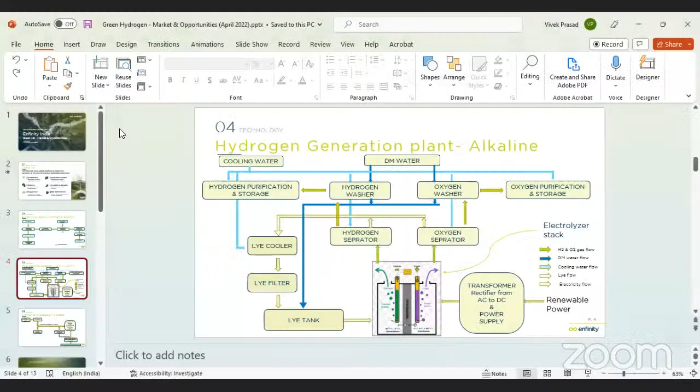But let us discuss the main topic here. Before going into the market opportunities, let me give a very basic idea about what we're talking about in terms of a green hydrogen and ammonia system. This is a basic flow diagram showing how a simple hydrogen plant and an ammonia plant look like.

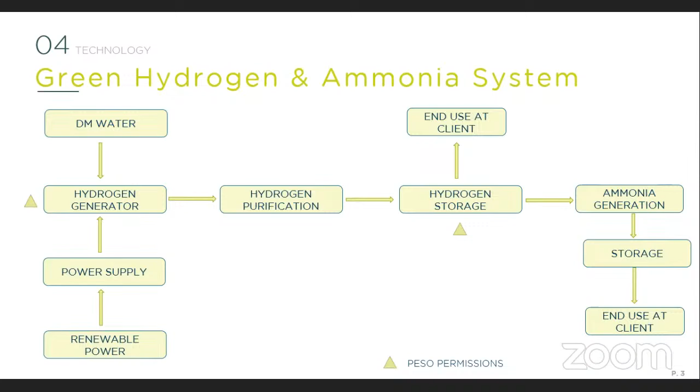This is a basic layout of alkaline-based technology. In the middle, you see the core of the electrolyzer. On the right-hand side is the renewable energy, which you convert from AC power into DC to power the electrolyzer. There are hydrogen and oxygen separators, which form part of the balance of plant. You also need cooling water to reduce the temperature so it can be reused. This is just a flow diagram of an alkaline-based electrolyzer.

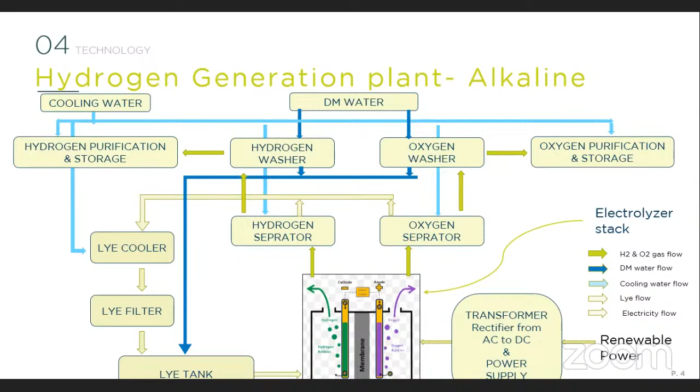For PEM-based and SOEC technologies, you will get more information as we move forward in the webinar.

So again, if you are going for green ammonia, you use green hydrogen along with an air separation unit, which generates nitrogen. That nitrogen is put into a high pressure, high temperature reactor with an iron catalyst to give you ammonia, which is in gaseous form and has to be cooled so it turns into liquid. This is just a basic process of ammonia production, though complications arise at the detailed engineering level. I just wanted to give an idea of how production of ammonia and green hydrogen looks like.

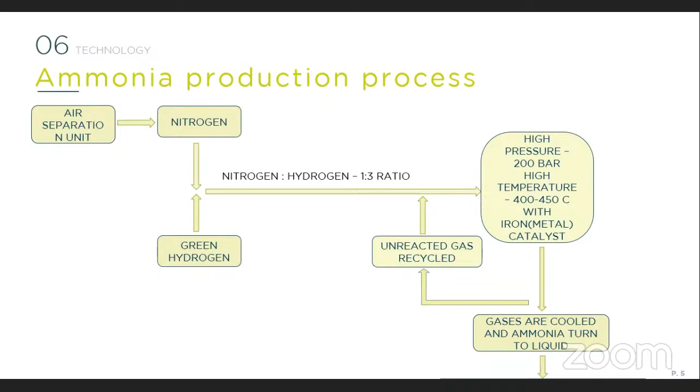Let us go further into how a business structure for hydrogen typically looks like. As a developer, I'll give you an idea of the structure and business model for hydrogen. This is one of the models we are working out, very similar to renewable energy - similar to the RESCO model. The basic difference is that the pricing of hydrogen or ammonia is based on per kg or per ton of output, whereas in renewable energy it was per kilowatt hour of power.

So at the end of the day, one is the end user of this green hydrogen. In between, there is a developer of the green hydrogen project as well as the ammonia project. The developer has to take a technology risk and the renewable energy cost risk. So that is how the structure will look like for much bigger projects, because the developer will be doing such projects and then will have an offtake agreement with the clients. On the right hand side, you can see what things are usually included in the pricing when you talk to the client about such projects.

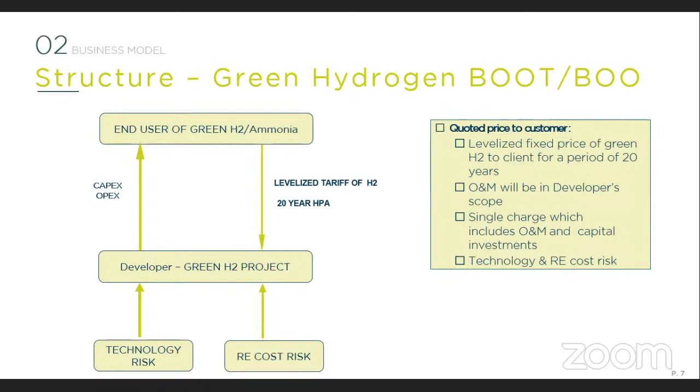Moving to the factors that decide the market for green hydrogen and ammonia. Let us first understand how the pricing of hydrogen is getting affected by different factors.

One is the cost of power. Now, cost of power is depending upon 3 to 4 important things. One is definitely the banking for green hydrogen projects, when you are setting up a green hydrogen plant.

So you know that there is an intermittent supply of renewable energy. Renewable energy cannot be a 24/7 work. So therefore, you have to try to get a banking facility for the green hydrogen in that particular state. Banking in green hydrogen projects is very important. Otherwise, if the banking is not available, the cost of power will increase manifold. The reason is that to set up an X size of hydrogen plant to get that 24/7 output, you have to set up a much bigger size of the hydrogen plant and the renewable energy. So therefore, that is one of the factors.

Then TOD is the important factor. Time of the day is defined differently in different states, depending upon the peak demand and the non-peak demand. So that has to be considered.

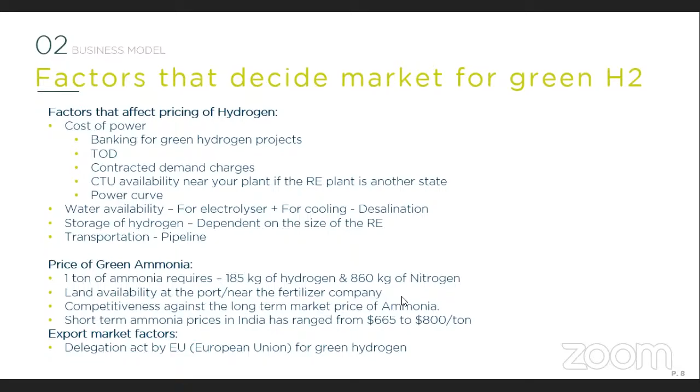Let's talk about market opportunities. In terms of market opportunities, I'll talk about green hydrogen first, then green ammonia. For green hydrogen projects, I'm talking about distributed sizes, and for different sizes I've mentioned relevant industries.

If you're planning to set up a 100 Nm3 per hour to 1000 Nm3 plant, about 1 to 5 megawatt, you should target the steel industry, which uses hydrogen in their annealing process. Then there's the glass industry, which uses hydrogen to avoid unwanted oxidation, increasing efficiency. In chemical, pharma, and food industries, hydrogen is used in the hydrogenation process. Finally, thermal power plants use hydrogen as a coolant because it has a very high specific heat.

These are the industries that look for these smaller, distributed plant capacities. When I say distributed, I mean these plants have to be set up at the company's premises itself. However, you can set up the renewable energy part outside the company premises.

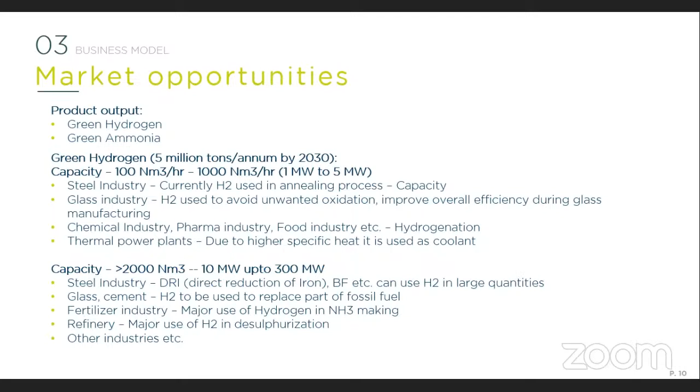When you talk about green ammonia, I will be talking majorly about export in terms of green ammonia. So if you talk about capacity of ammonia, we are talking about 0.175 million tons to 0.87 million tons of ammonia.

Hydrogen is a very difficult gas to store and transport. Because of the huge volume it needs, it is not feasible to store it for longer hours. I'm talking about the size of the vessels compared to ammonia, which is easy to convert into liquid form and then can be stored. So these things can be done easily, making it easy to transport ammonia over longer distances.

Therefore it is easy for export as well in outside markets. Now, if you see the major markets in the world for ammonia, other than India, there is the EU, which is planning for 10 million tons of hydrogen, equivalent to 50 million tons of ammonia. Similarly, Japan is planning for 3 million tons of hydrogen, and South Korea for 3.9. This is the requirement of these countries by 2030.

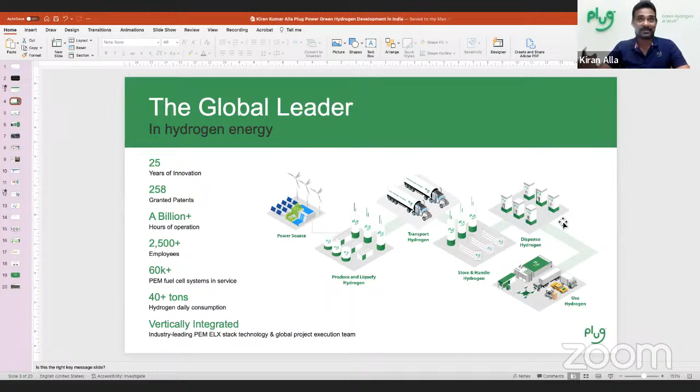Since we have presence in the complete end-to-end hydrogen production to hydrogen consumption, I'll take some liberty in making certain statements based on our experience. So Plug's story started with a very simple application, but one that is now commercially proven. Commercially proven is the keyword here.

Plug has been in fuel cells, but when it met customers for various applications, one application that stood out is replacing a battery with a fuel cell and using hydrogen to fuel it. With this application we found major traction, and customers asked Plug to supply the hydrogen so they wouldn't need to worry about where to get hydrogen, where to store it, or how to dispense it. Plug has been doing this for a long, long time now.

As I said, more than 60,000 fuel cells are in operation, all of them use hydrogen, and more than 50,000 refuelings happen every day. These refuelings are done by the operators. So as you can see, if you follow the code, if you follow the standards, you can actually handle hydrogen fairly in a standard manner, just like Vivek mentioned, just like natural gas, and maybe a little bit easier, not very complicated. So we bring this hydrogen utilization experience to the table, not just as an equipment manufacturer.

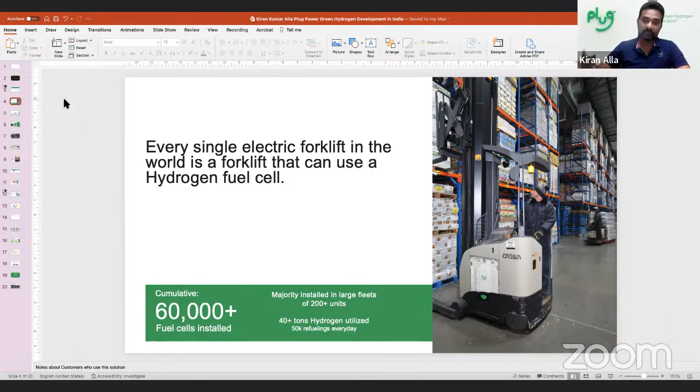So then comes on this screen, you can see the various products, the ecosystem of products that we have. As I said, we have electrolyzers and liquefaction. We are actually building a green hydrogen production network in the United States, and we have plans to reach a capacity of 500 tons per day of green hydrogen by 2025.

We have solutions for green hydrogen delivery. You've seen the hydrogen trailers that can transport hydrogen across the country or continent. We have hydrogen refueling stations, and as I mentioned in the previous slide, the starting application was fuel cells in forklift trucks. Now that is getting extended to light commercial vehicles and many other kinds of vehicles. I don't know if anyone of you noticed there was recently a flight that used hydrogen for flying. It was actually powered by Plug's fuel cell.

Similarly, the last and most important application is stationary fuel cells. We are now starting to deliver a megawatt scale fuel cell for electricity for backup applications, not on the grid exactly, but in areas where grid is not available or grid will take time to reach. But power is required now, clean energy is required now, so that is another application where we are seeing a lot of traction.

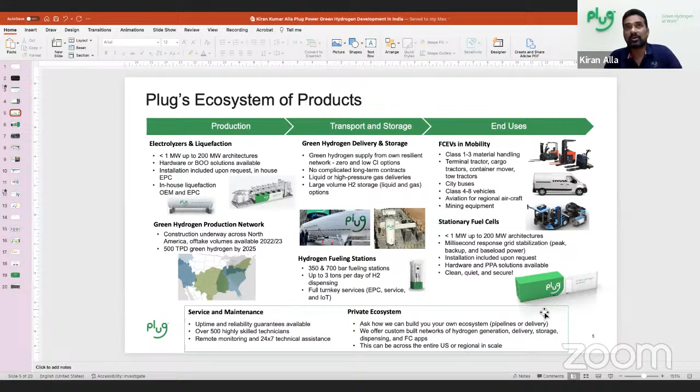We also provide service and maintenance, and we can help customers develop their own ecosystem so that they can actually adopt hydrogen today, not tomorrow, need not wait for tomorrow. So that's what Plug does.

Coming to hydrogen production, Plug invested in the PEM electrolyzer technology. Our fuel cells are also PEM fuel cells, but the electrolyzer selection has been done based on the key merits of the technology. As the previous speaker mentioned, there is a general misconception in the market that alkaline is currently cheaper. And if you talk about the future, a lot of people say PEM is promising, but AEM is coming, so that will be cheaper in the future. But let me tell you, PEM is currently the competitive and mature technology, and PEM will remain a competitive and mature technology in the future.

If you see the direction in which all electrolyzers are moving, alkaline is moving towards how PEM is designed, how PEM is modular, how PEM kind of works. Similarly, anion exchange is a combination of alkaline technology and the operating principle of PEM. On the other hand, PEM is continuously improving. PEM has been in operation for the last 40 years. This particular electrolyzer technology was being supplied to NASA and even the space station and other places.

But now the key idea is it's not lab scale, but megawatt and gigawatt scale. What you see on the screen on the left side is a megawatt, 1 megawatt stack. That is a building block for our electrolyzer solutions. We have set up a gigafactory, and now we have a capacity to produce about 100 megawatt per month. There is a clear roadmap to reduce precious metal usage significantly, and the energy density will increase, stack size will increase. So there are multiple threads by which the technological development is happening.

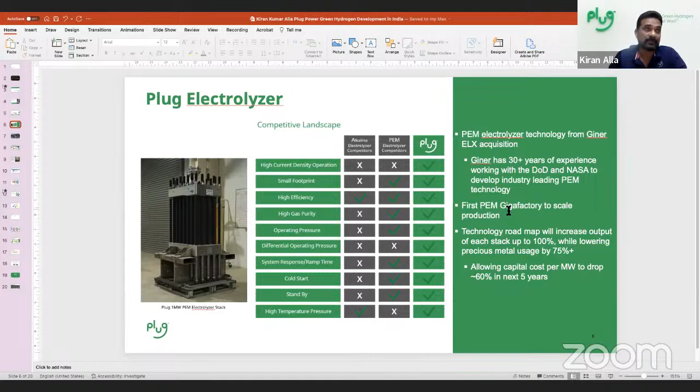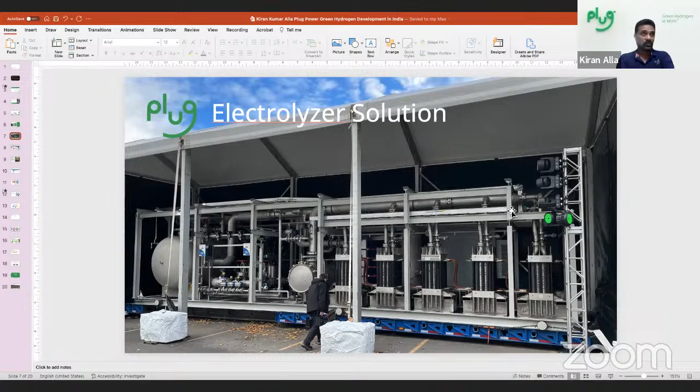So what you see on the screen is a containerized 5 megawatt system. This is a container opened on one side, you can see the stacks here, there are about 5 stacks, so this is a 5 megawatt stack. There will be other containers for other utilities, and we will be delivering one such system to India in a month or two, and you will definitely notice it in the market.

Plug has been working with industry leaders on providing hydrogen solutions. You can see right from market leaders like Amazon, Walmart, or IKEA, and you also see automotive players like BMW, General Motors, and many other companies using our solutions.

I can tell you one very interesting application. In Germany, an electric car manufacturing company uses hydrogen fuel cells for their forklift trucks. So it's very important to understand that hydrogen has a specific advantage, and in certain use cases, even at current prices, it is competitive to other solutions.

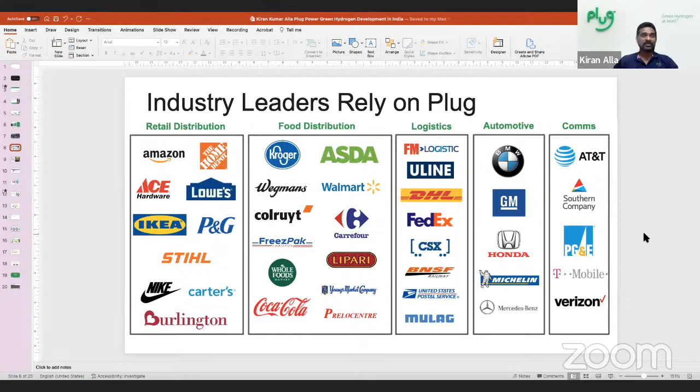And as our webinar organizer mentioned earlier, India, interestingly, has taken a very direct stand that we will not let this opportunity pass. We will do what is necessary to be in the game, to be a major country in the hydrogen ecosystem.

We don't want to simply take technology, but we want to manufacture, we want to develop, we want to be a critical country in this hydrogen ecosystem. Plug, through one of its acquisitions, now has 150 engineers in India, all working on electrolyzer systems and fuel cell systems. I think we have the largest team working focusedly on hydrogen in India at this point.

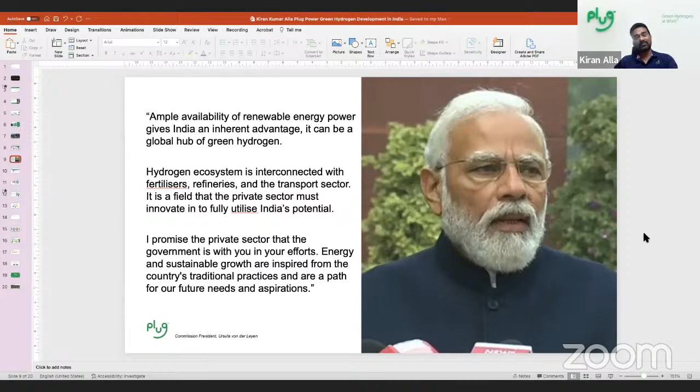Okay, let me diverge a little bit here and talk about why hydrogen. Why are we talking about hydrogen? There's always the argument that we need to shift to green and clean energy, and we should use as much renewable power in the grid first, rather than for green hydrogen. Actually, it's not a competition between clean energy for the electricity grid versus renewable energy for hydrogen.

If you think about it, the real challenge in front of all of us is decarbonization. From that perspective, after the top 4 or 5 countries, global hydrogen consumption produces the highest amount of carbon dioxide emissions, close to 1 billion tons of CO2 per year right now. That means this hydrogen is already being produced from other methods, there is carbon emissions, there's a lot of experience using this hydrogen, and there's commercial value in using it. So there is nothing to be cracked here except the production part of it.

By displacing or replacing this gray hydrogen, the advantage is that the scale-up required for clean and green hydrogen will be provided by decarbonizing global hydrogen. That will provide the cost reduction and scaling required to bring hydrogen to other sectors and solutions. It is not just for one or two applications.

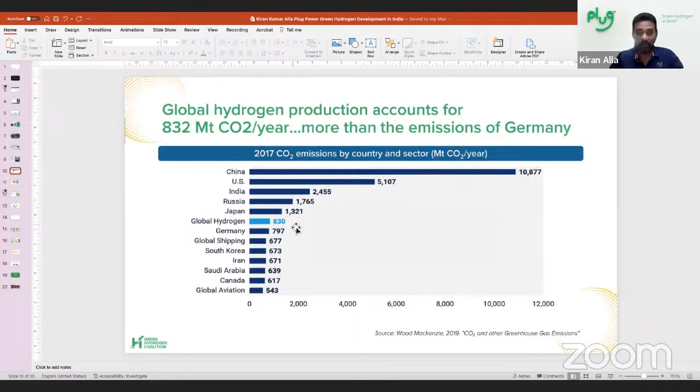Because we all know hydrogen is nothing new. We all know about hydrogen, it has been there for a long time. But it's the carbon emissions that are driving us to consider cleaner options, and in order to adopt it widely, we need to reduce the cost. So that's the key motivation.

This is something we should not lose focus on. Competitiveness, yes, we should look at from a rupee per kg or rupee per calorie perspective, but we should also look at carbon intensity for energy use. If we lose sight of carbon, we are losing sight of the future. By focusing only on the dollar or rupee value, we are only focusing on the present, but losing focus on the future if we don't consider carbon intensity. That's something we need to be cautious about, not lose that focus, not say this is not competitive, because we are building the future on this foundation of clean energy.

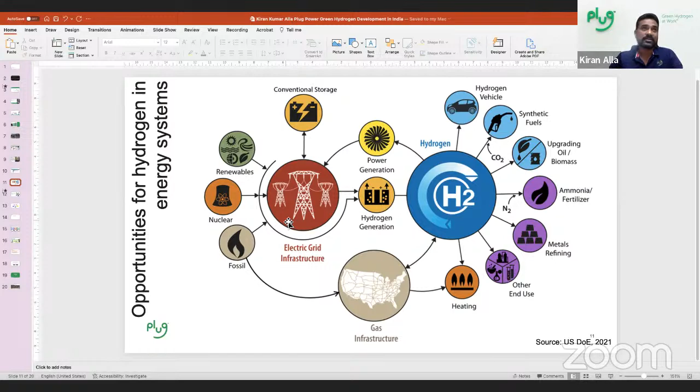Solar, when it started, was like 17 rupees per kWh, but today it's 2 rupees 50 paisa. Even if you add storage, it will be competitive with other technologies. It has reached where it has reached because we supported it in the beginning. Same thing with green hydrogen and green ammonia. It's very important to consider what we are doing right now - the first 5 years is like the foundation. So the focus should be on carbon intensity, on adopting as many applications as possible, and seeing how we can reduce the cost in the coming years.

Just in line with this, one of the thinking behind Plug trying to do everything in the value chain is that integrated technology creates a flywheel effect. Each of these applications will help each other. So industrial decarbonization will reduce the cost of hydrogen and increase experience of handling hydrogen.

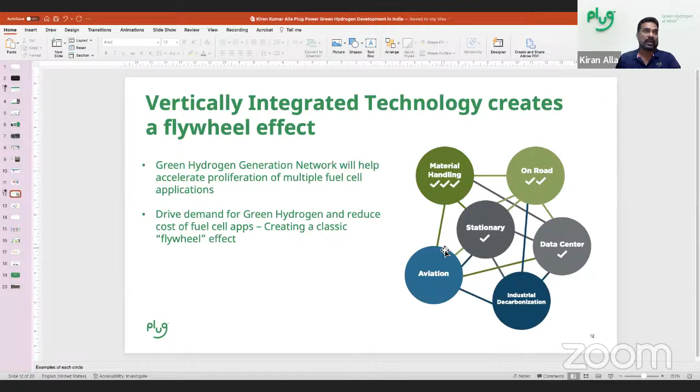We already have a lot of experience in material handling, as I showed you. This will be helpful in on-road applications, and will help in stationary and data center decarbonization. Similarly, we can go towards aviation and many other applications. It's very important that hydrogen should not be seen as a limited, single-area application. It will start in one area and then expand into others, going hand in hand with clean electricity. That's the key thing we need to keep in mind.

At a high level, I know Vivek went into more nitty-gritties, but I'll show a slightly high-level motivation. In India, we all know we import a lot of energy. We spend at least 100 plus billion dollars every year to import energy. We don't have domestic gas, so we import a lot of gas. This is a key motivator, because as we've seen both during COVID and because of the war, there's been disruption in supply chains, including energy supply chains.

So there is a need to create energy security, and clean energy is energy security. No country in a war can block your sun. No country can block the wind that is coming to you. If your hydrogen production is inside and you can store it for a long duration, you have that energy security dimension taken care of. The other dimension of clean energy is that you invest in the technology now, and for a certain period of time you don't face inflationary pressures. The inflation elements in clean energy are much lower compared to other energy sources.

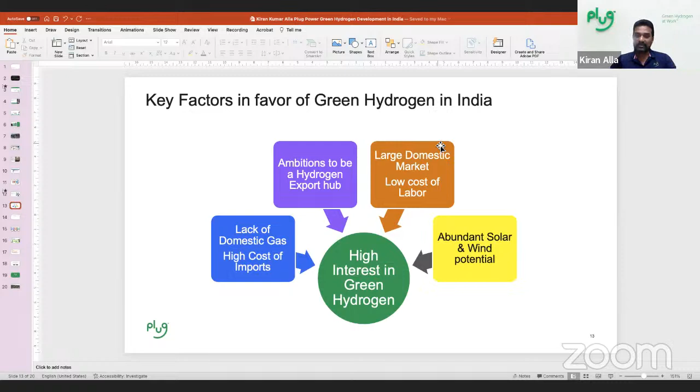We want to be a hydrogen export hub. We have a large domestic market, definitely a lower cost of labor, and abundant availability of technical resources. Also, our solar and wind potential is significant. I think all this makes India an ideal location for green hydrogen, and we are seeing interest both from the government and from other players in the market.

Now, these are the key sectors where we'll find applications. I think Vivek kind of went into it, so I won't go into detail. But industry feedstock is where the maximum focus is - that's the left side. Then comes natural gas blending, then the applications of transport and electricity will happen. Transport and electricity will be more of pilots, natural gas blending is more of a demonstration. Industry is where the real major takeoff will happen in the initial phase.

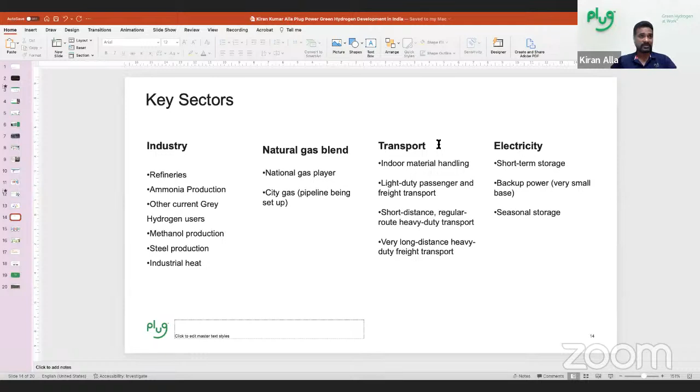In the last 10 years or so, we've done a lot of clean energy development, so it gives us a sense that all you have to do is provide certain inputs and you'll get the output. It is not so. Hydrogen is a little more complicated than other clean energy projects. So it's important to take the multiple dimensions into account and understand the trade-offs between each of these parameters. I'll quickly go over this, and maybe if you have questions we can discuss.

The cost of electricity occupies a lion's share. If you take a 25-year perspective, people typically talk about 70%, but I'd say it will even cross close to 80% of the cost, because this is one cost that will not reduce. It will stay as is, and it is directly proportional to the kilograms of hydrogen you produce.

So this cost will remain as is. It's important, therefore, to figure out the right kind of electricity input - whether you want to co-locate, whether you want decentralized production. The T&D losses and charges are also critical because they aren't visible, but they impact the whole cost. Lastly, the important thing is availability and reliability of electricity, which brings in the dimension of variable renewable energy resources. It's important to understand that if you use a variable resource directly, the technology needs to be suitable. But let's say someone says, no, I will use storage, banking, and other opportunities.

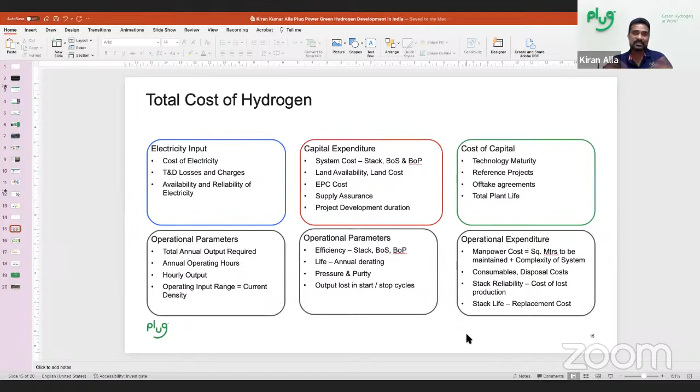And lastly, the stack life, which is a replacement cost. A lot of people think this is very, very important, but I'd say if stack life is more than 80,000 hours, you're looking at least 10 years, and in 10 years the cost of stack will go down significantly, so it won't be very high. But if you're looking at 40,000 or 20,000 hours, you have to model this carefully - it could be significantly high because the cost of stack won't reduce in just 2 or 4 years. It will take at least 5 years for the stack cost to come down significantly. I'm sure all of you know this.

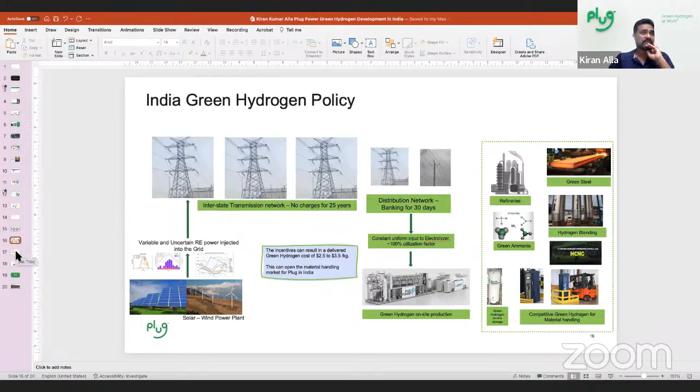One advantage is that the government has shown commitment by providing a waiver of interstate transmission charges for 25 years. That means if you set up a plant now, you can have free interstate transmission charges for 25 years. This kind of benefit helps developers significantly, so this is something we need to take advantage of in India.

As more and more electrolyzers are established, the cost of electrolyzer can actually reduce faster than the cost of renewable energy. So the reduction we've seen in solar can happen in hydrogen too. But the important thing is it needs scale right now. The current installations are the foundation on which future cheaper electrolyzers will be built. So today's installations are as important as tomorrow's installations.

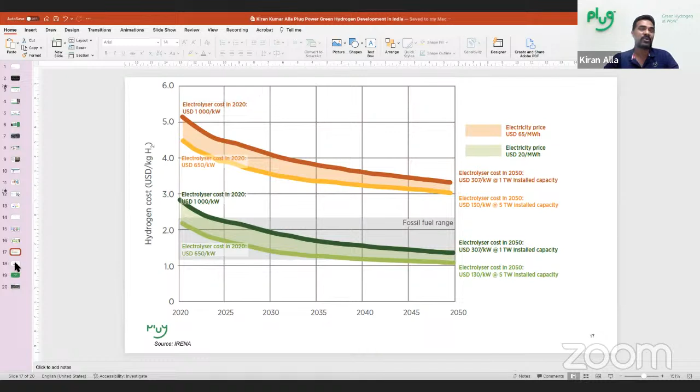Transitioning into a decarbonized energy era is neither a sprint nor a marathon. It's not a race, there is no finish line. It's a daily routine, a fundamental habit built on small changes leading to transformational change. We need collaboration at every level, all the ideas, all the players, all kinds of solutions. It's not only ammonia, not only hydrogen, it could be methanol or any other solution that can decarbonize. It's not this or that, but it must be this and that.

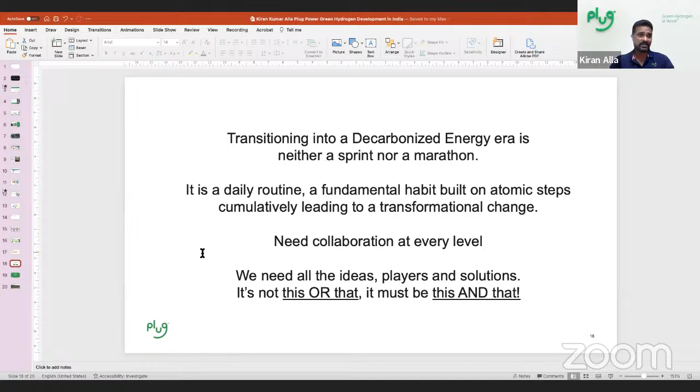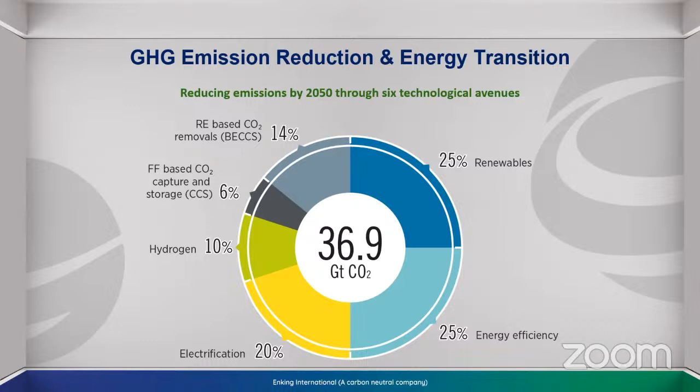As I have already talked about and shown, almost 10% of the total decarbonization story up to 2050, taken from the IRENA study, depends on hydrogen and hydrogen for hard-to-abate sectors. Green hydrogen needs have already been sufficiently deliberated by Kiran and Vivek, so I don't want to spend too much energy on that. But mainly present hydrogen utilization is not green hydrogen, it's gray hydrogen. There is substantial gray hydrogen utilization, which Kiran has shown, and it's around the fifth or sixth position in total global carbon emission footprint considered from hydrogen utilization.

That's possibly the first area where there is consumption, as well as efforts in hard-to-abate sectors, including metallurgy, fertilizer, oil and gas - particularly the downstream segment of oil and gas - and also heavy transportation, long haul cross-country transportation. That's possibly the first area.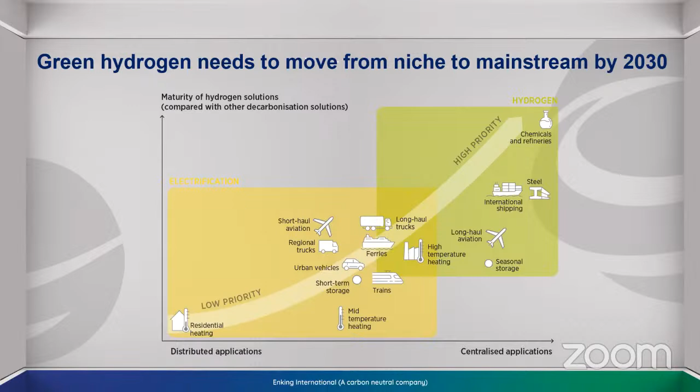On the costing perspective, talking about the same thing, 28% of industry carbon footprint is coming from this hard-to-abate sector. So 28 plus a few percentage, almost 30%, is hard-to-abate sector. This is data, I think, from IRENA also.

Now, on green hydrogen production costs and break-even, there's been a lot of micro discussion. I just want to highlight, as various industrial players including Kiran and Vivek have noted, that on the carbon market perspective, green hydrogen is getting a lot of attention because it is ultimately going to reduce or avoid substantial carbon emissions from various hard-to-abate sectors. And in the carbon registry system, a methodology has already been developed.

It is under approval, where project developers can register their projects as green hydrogen carbon emission reduction projects, and the credit will be sold at a premium. That may create substantial revenue flow to support the initial cost parity or cost differences, and create an enabling environment for the industry to pursue it.

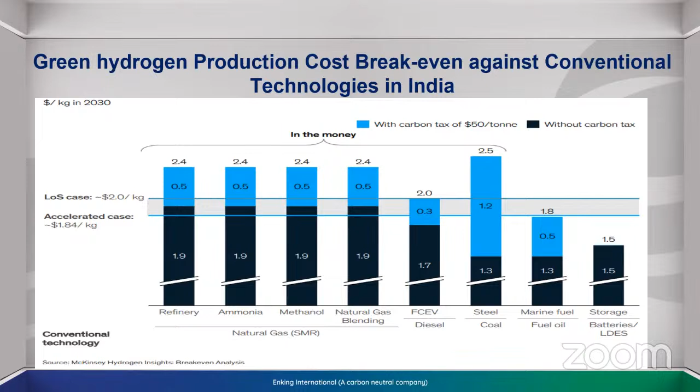In both ways, this carbon accounting - either to avail direct revenue flow or indirect competitive advantage in the form of reduced footprint - can be availed, and we are one of the largest in the world who provides all these services.

Now, competitiveness of green hydrogen has been studied by McKinsey, with a few assumption parameters taken on. It has been shown that by 2030, more or less, green hydrogen will be competitive in present refining, methanol, and ammonia applications, which has already been told, and maybe closer to 2040 or beyond.

The competitiveness, in an aggressive scenario, will happen in long haul transportation as well as power storage, because we have to add so much renewable or variable power to our systems, so storage is definitely going to play a role. It's not a battery versus hydrogen storage debate - every technology should be used based on its pros and cons. So storage will be viable through the green hydrogen process.

But when we decide on green hydrogen adoption, material sustainability and security on the particular technology we choose within this country should be taken into account. Like the lithium-ion battery case - that is getting into another 'oil' kind of situation. We should not repeat that, or we should learn from those aspects.

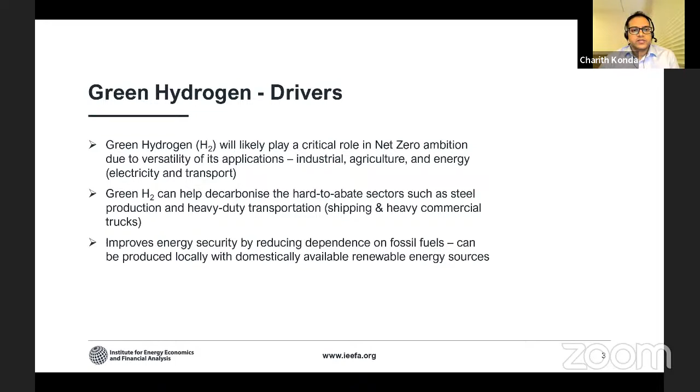So what are the applications, near term versus medium and longer term? In the near term, I think the low hanging fruit is the opportunity to replace the majority portion of the around 6 million metric tons per annum of conventional hydrogen. That is what we call gray hydrogen, which is made out of natural gas, which is being used in oil refining and fertilizer or ammonia production. So in the near term, if you can cash in on that opportunity, that would be the basis for further growth of the green hydrogen sector.

In the medium and longer term, steel production and heavy duty transportation, including shipping and heavy commercial vehicles, come into play. Also, hydrogen as an energy storage could play a role in the medium to longer term. Steel production, as you all might know, requires a change in the production process, and additional capex is required, so it might take some time for green hydrogen to pick up on competitiveness among the fuels.

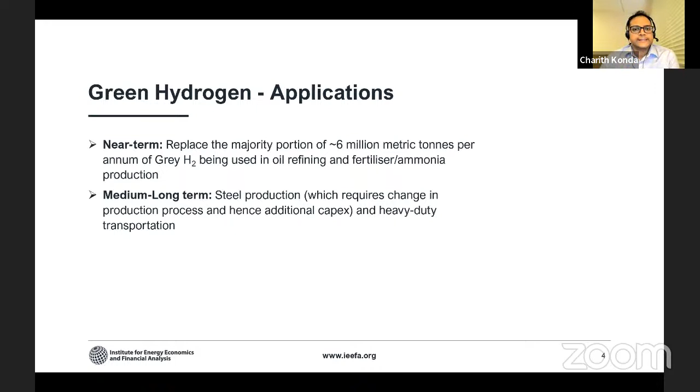It's not just all a story of ups, so there are certain challenges as well, downsides in terms of tapping into the opportunities that green hydrogen could give. One is, as you all know, the cost of green hydrogen compared to conventional or gray hydrogen is twice as much. Gray hydrogen is produced through steam methane reformation, whereas green hydrogen is produced through electrolysis of water. So cost is a major challenge as of now.

And the second thing, another discussion point, is whether we use existing renewable energy generation capacity, or do we need to deploy additional renewable energy generation capacity.

The way the world is going forward, or at least advanced markets such as Europe, is to set up additional generation capacity, renewable energy generation capacity, to produce green hydrogen, because existing renewable energy already has competitive uses in the market. So hydrogen should be additional to existing green initiatives. According to Government of India estimates, India needs 125 gigawatts of additional renewable energy capacity to produce its target of 5 million metric tons per annum of green hydrogen by 2030.

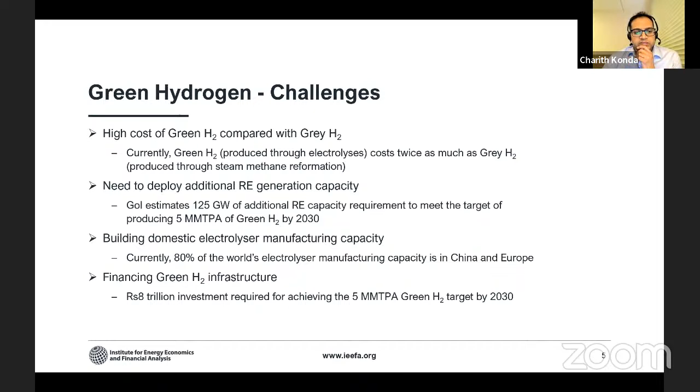And all combined, who would finance this green hydrogen transition? According to government estimates, we need Rs8 trillion of investment to achieve our 2030 target of 5 MMTPA of green hydrogen. These are the main challenges the industry has to counter. Now, as my topic is about costs, I'm not going to talk about the remaining aspects in detail, but focus on the costs.

So at a high level, how do we analyze the costs? As one of the speakers said, it's very difficult to look at the costs and give them numbers. We all like to do this comparison, but for the sake of this discussion, I thought of putting it in numbers. Take it as an estimated number, an intelligent guess. What we need is some kind of comparison.

The world is debating whether we should call it green hydrogen, blue hydrogen, gray hydrogen, assigning various colors, or just go with the percentage of carbon emissions per kg of hydrogen. This discussion is happening in international forums, but for this discussion, let's go with the existing definition. Green hydrogen currently costs $3 to $6 a kg globally, depending on where the plant is and what energy costs it's incurring, compared to conventional gray hydrogen at $2 to $2.5 per kg. Blue hydrogen is nothing but conventional gray hydrogen equipped with carbon capture, utilization and storage.

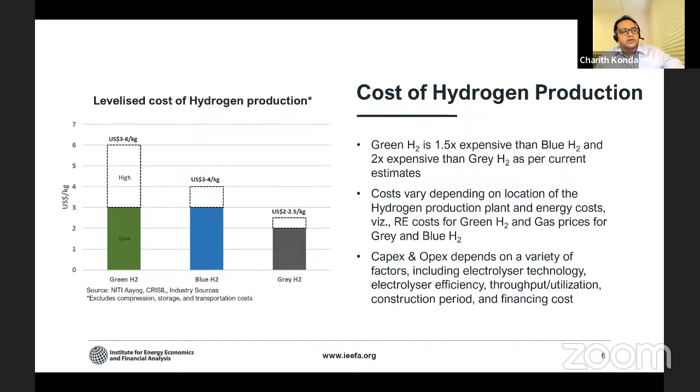If you dig deeper to see the cost components, there could be multiple, but at a high level, if you divide these into buckets for comparison, there's capex and opex cost across the colors and technologies of green hydrogen production. Then there's energy cost, and add to that transmission and distribution for green hydrogen, and carbon capture and utilization costs for blue hydrogen.

The major component for green hydrogen, which makes it twice the cost of gray hydrogen, is the energy cost and the cost of supplying that energy to the green hydrogen plant, which is nearly up to 70% of the total cost of green hydrogen at this estimated point in time, and which might go even higher as electrolyzer costs come down.

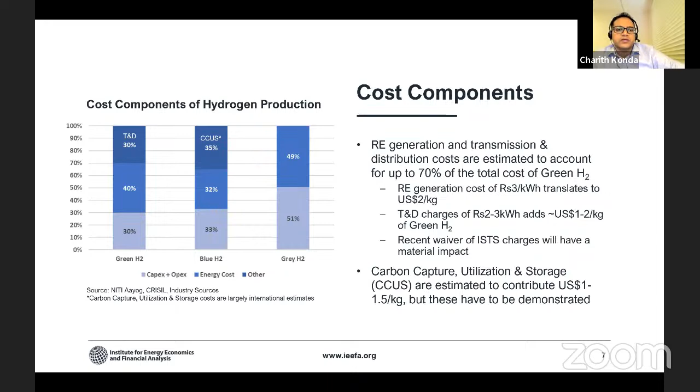In a way, the government has recognized this cost. They have recently waived the ISTS charge, the interstate transmission charge on the CTU, the central transmission utility. This will have a material impact, given it's 70% of green hydrogen costs. As I said, for blue hydrogen, CCUS charges are estimated — we're not very confident on those — but for this demonstration, it might account for 30 to 35% of blue hydrogen costs.

Moving forward, so what needs to be done? What are the cost reduction levers?

As we spoke, reducing renewable energy generation costs as well as transmission and distribution costs is critical to lower the cost of green hydrogen to somewhere around $2 to $2.5 per kg, if you are looking to replace gray hydrogen competitively. Roughly, as a thumb rule or benchmark, if the per unit cost of rupees 1 per kilowatt hour of green electricity, that will translate to somewhere around 75 cents to 1 US dollar per kg for green hydrogen.

So this is something that policymakers and all of the industry stakeholders can keep in mind in terms of how low we should be aiming for these energy costs and supply costs to come down to achieve competitiveness in green hydrogen.

Again, interstate transmission, realizing its importance, ISTS charges were waived off earlier till 2025, and now very recently extended till 2030. So any plant even set up in 2030 for the next 25 years need not pay for ISTS, but the plant should be able to directly connect to the CTU.

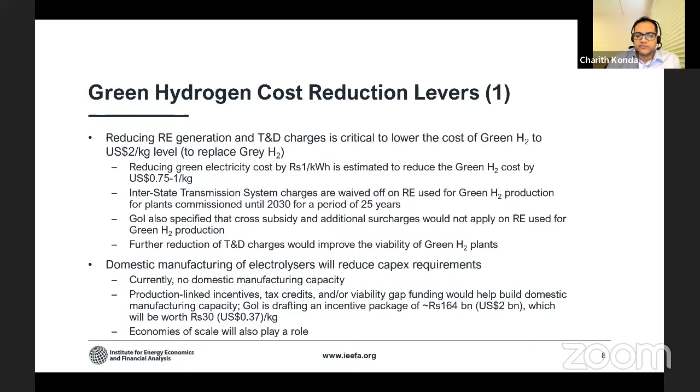It's not for electrolyzers alone. Initial reports indicate that of this $2 billion incentive, almost 70% would go toward renewable energy generation and supply cost incentives, and the remaining 26% to 30% would go for electrolyzers. So largely, I think when the market develops, a mix of incentives as well as economies of scale would make a lot of difference in bringing down the cost of electrolyzers.

Another important cost reduction lever is partnerships. This cannot be taken in silos. This is a capital intensive industry, whether we like it or not. So we need learnings from other sectors in the market, and we need partnerships among capital providers, technology holders, EPC companies, logistics providers, and end users themselves to develop a robust supply chain that could drive down costs.

Europe is somewhat attempting that in developing hydrogen hubs, which brings all of these players, other than the capital providers, together at one place to drive economies of scale and reduce costs in the supply chain.

You can see the market moving that way. Some recent collaboration agreements were signed between Indian Oil Corporation with IISc, Greenstat of Norway for electrolyzer technologies, and L&T and Renew Power to bring other power generation and engineering expertise to IOC. Likewise, ONGC has tied up with Greenko ZeroC Private Limited, Adani with Ballard Power Systems, and Greenko with John Cockerill of Belgium.

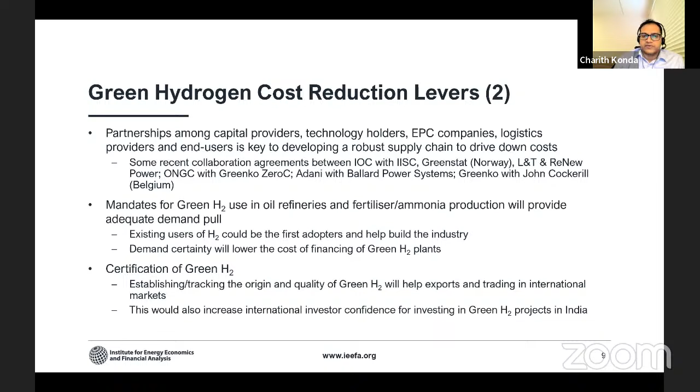And this, again, as I said, is a capital intensive industry. So if we could define and certify what constitutes green hydrogen, it will boost international investor confidence and attract investments into green hydrogen projects.

So with this, I'd like to end my presentation and hand over to Mr. Santosh.

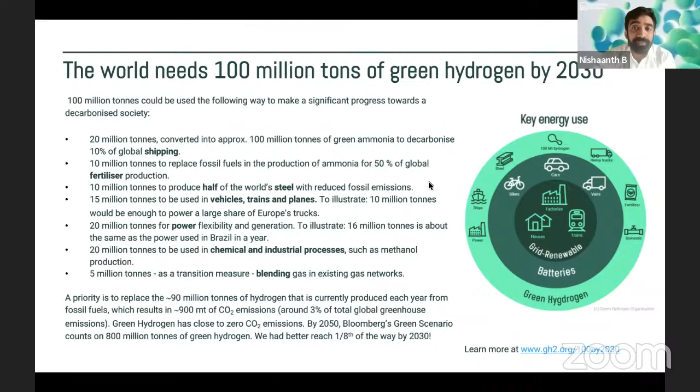Now, the Green Hydrogen Organization is also a multi-stakeholder group. We work with UN bodies, governments, finance institutions, private companies, civil societies, and communities, including think tanks and knowledge hubs as well.

In India, we've been active over the last several months, and some of our hubs and international partnerships include our partnership with the Egyptian government for their Center of Excellence. In India, we are partnering with the Uttar Pradesh government, specifically UP NEDA, their renewable energy arm, to set up a Center of Excellence here in Lucknow. We are in talks with an Indo-Danish partnership to set up another Center of Excellence, possibly in Chennai. And we are also partners with the Center of Excellence for Hydrogen in IIT New Delhi, which was instituted by Gexcon and Greenstat through an Indo-Norwegian partnership.

So we also liaise with several embassies here in India through various bilateral initiatives they may have, examples being GIZ, Business Sweden, the Indo-German Energy Forum, and several others.

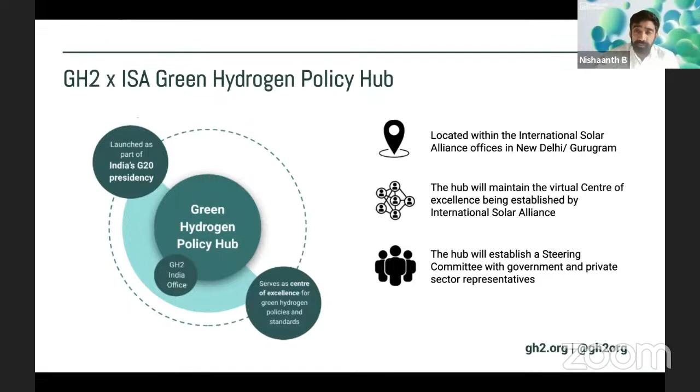India's green hydrogen landscape - we all know the government is very active here. Like I think Kiran mentioned, or it was Vivek, India's import of fossil fuels is tremendous, close to about $160 billion a year, I believe. And these also contribute to a lot of carbon emissions. So India has very good reasons to move away from this and adopt something like green hydrogen. Added to that, we have one of the cheapest renewable energy costs across the world. And in line with all of this, we are seeing record amounts of investments for renewables here. I think the government is looking at about 5 million tons of green hydrogen production by 2030.

So today I'm going to focus on the Green Hydrogen Standard, which was developed by our organization beginning COP26 in 2021. As previous speakers mentioned the need for standards in this evolving industry, we recognized this need in 2021. At this point, there was no organization that was looking at setting standards for green hydrogen and certifying green hydrogen production.

So we've developed a standard. We are running pilots across the world right now. In India, we have two of the major companies partnered with us and running the pilot right now, and we have several other companies in Australia, Chile, Africa, and Europe.

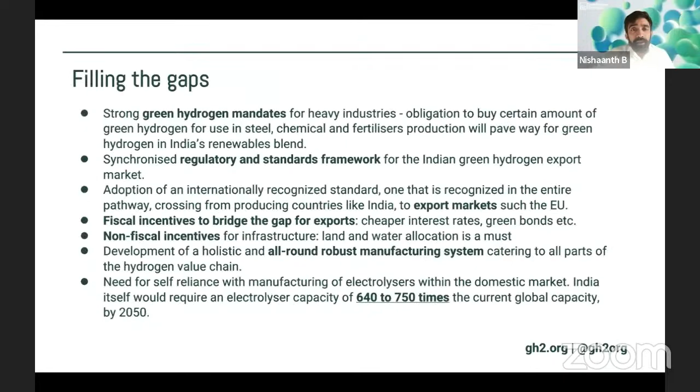So I'm going to skip this slide. All of this maybe this is something important - I will go through this one.

So why do you need a green hydrogen standard? When you start early, it helps you mitigate a lot of risks. It helps you identify risks, and it helps align your project with global best practices.

Now, the green hydrogen standard is not just a certificate mechanism where we give you a certificate of origin. It's not only that. We also ensure that you are engaging with the communities, you are using the right water resources, there's health and safety, and there's accountability for your projects. So as you can see, we are very concerned with the impact of this industry on communities, on land, because in our past we've made these mistakes and then we've realized them and we look to correct. So through the green hydrogen standard, we want to ensure that any green hydrogen that is produced is produced sustainably.

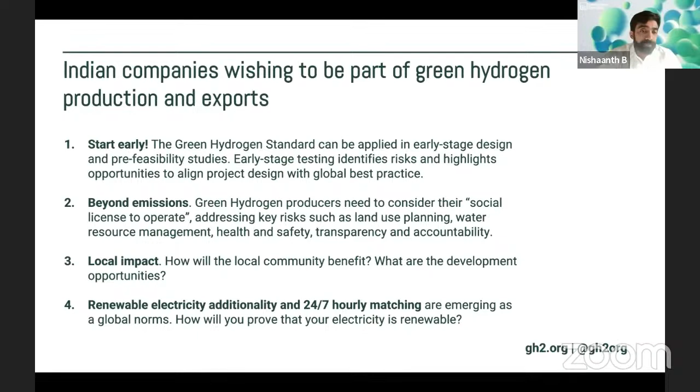One of the key features of the green hydrogen standard is a definition for green hydrogen. For every 1 kg of green hydrogen, there has to be less than 1 kg of carbon emissions, mostly scope 1 and scope 2 emissions, and this is only until production.

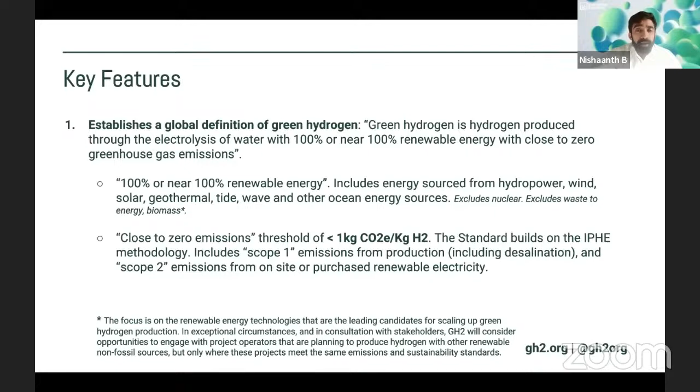I'm sure I don't have to define green hydrogen for this audience, most of you are well aware of this. So like I mentioned earlier, our standard requires that environmental, social, governance consequences of green hydrogen production are addressed, and that development opportunities and impacts of green hydrogen production are fully considered.

Now, going into our certification and accreditation process. When we support early stage projects, we provide support for scoping pre-feasibility studies, and we ensure that you have access to best practices and guidance.

Best practices and guidance in green hydrogen contracting and legislation is another initiative from our organization. We've partnered with 12 global law firms to build this guidance for how you get your land agreements sorted, how you get your offtake agreements, dispute resolution, and all of this.

In addition to that, we will support with engagement with governments, host communities, investors, lenders, and customers. On the second stage, the accreditation of projects that meet the green hydrogen standard, we will engage an independent assurance provider. For now, our pilots are being done by DNV.

We will have stakeholder engagement and public comment, and then this project will be reviewed by GH2's accreditation body. Once this is done, the projects will be licensed to use the label GH2 Green Hydrogen.

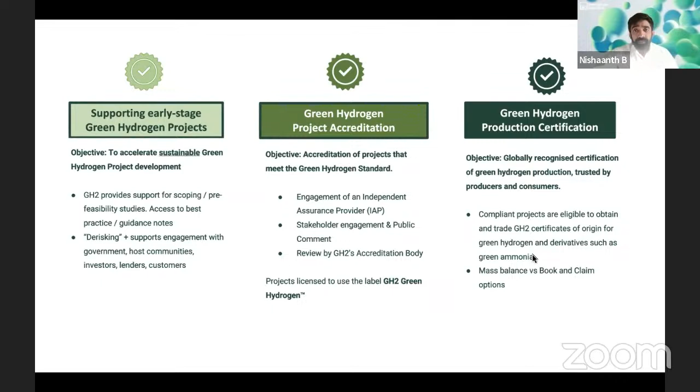Since that is a very extensive process, we've developed something else called the rapid assessment tool, which is in many ways a smaller version. We will just go through all of the frameworks we've developed and ensure that your project is in line with all of the requirements.

Ultimately, these standards are being set across the world right now. Australia has their own standard, the EU is coming up with their own standard, and the Indian government has had a stakeholder group through which they've consulted and just submitted their proposal.

Now, how are we different? We will align ourselves with national practices, with whatever requirements are here nationally. We will ensure whatever production is done here in India.

We will give you a compliance certificate letting you know that having used these subsidies and this kind of renewable energy, it is permitted for exports to the EU, or it's not permitted to export to Japan, or it is only permitted to Africa, etc.

So this is what we are aiming to do through the green hydrogen standard and our certification mechanism. We want to align with national standards that exist, but we want to harmonize global standards as well. Through this, we will facilitate global trade of hydrogen and ensure sustainable development of green hydrogen.